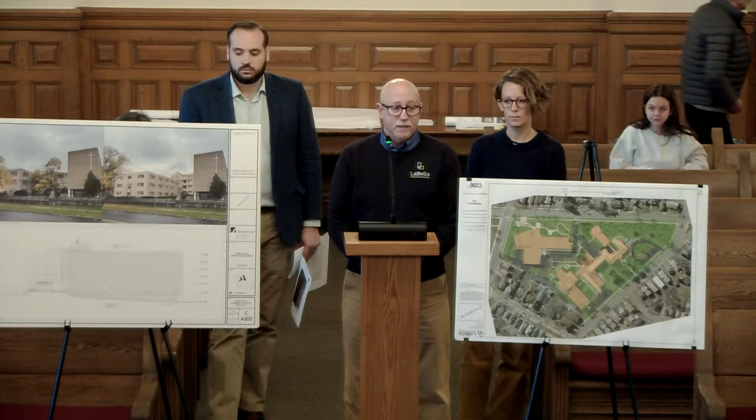Thank you. So today to discuss a proposed project at Maria Regina campus located at 2500 Court Street, corner of Grant and Court near Kirkpatrick's. We're proposing an affordable housing project on the existing campus. With the team that we have here today, I know we'll keep it short so we can open it up for questions. I can present anything that has to do with any of the site work, parking, anything we're dealing with the city right now. Brian and Ivan can talk to the buildings, and I thought I'd have Lindsay give you a brief description as far as how the project came to be and the project moving forward. Okay.

Good morning, Lindsay Allen from Home Leasing. Our address is 75 South Clinton Avenue, Suite 700 in Rochester, New York, 14604, I believe. We are redeveloping this campus into an affordable community for seniors. Proposed are 181 apartments across 5 of the 6 historic buildings on the campus.

The image that I provided here just shows you sort of a campus key from a historical perspective, when the buildings were constructed, some of the dates of those additions, and the building that we are not proposing to redevelop for housing is the chapel that's on the bottom left side of that image. We do have a very interested organization; we have a letter of intent for them to take over the chapel. So in reality, at the end of the day, the entire campus will be fully redeveloped and active once again.

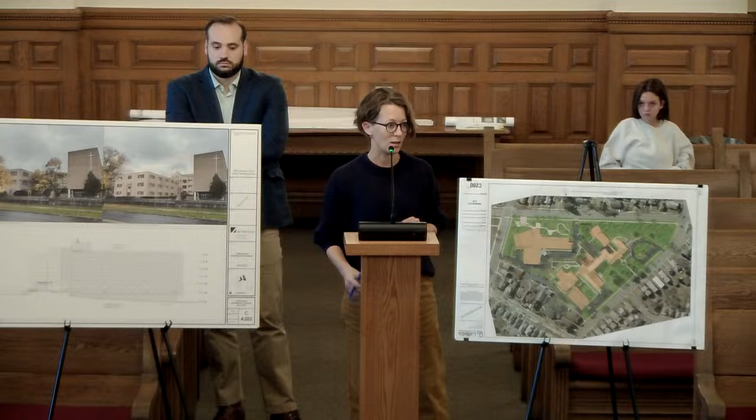But as you know, there's been a lot of proposals for the site. It's very difficult to redevelop, and we are working very hard to make sure that we balance the rehabilitation to mitigate the blight that's on this large block in a residential neighborhood and to provide much needed affordable housing to the seniors in Syracuse. So with that introduction, I'm going to turn it over to our architects to discuss a couple of the details here today. Thank you.

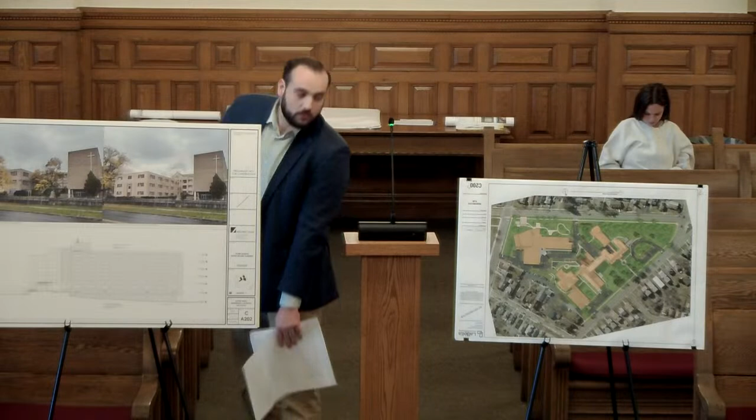Good morning, everybody. I'm Ivan Hansen. I'm an architect with the Architect Team, the architect on the project. Address, please. Oh yes, 614 James Street, Suite 200. I'll go through a couple of the major changes to the buildings that we're proposing. So if you look at the board. Okay, so this is what we call the convent school and the library addition. The convent school is a 1902 building, and I believe the library was built in the late 50s, early 60s. Both those buildings, we're proposing to turn those into residential units. In order to do so, we're proposing an elevator addition in between the two buildings.

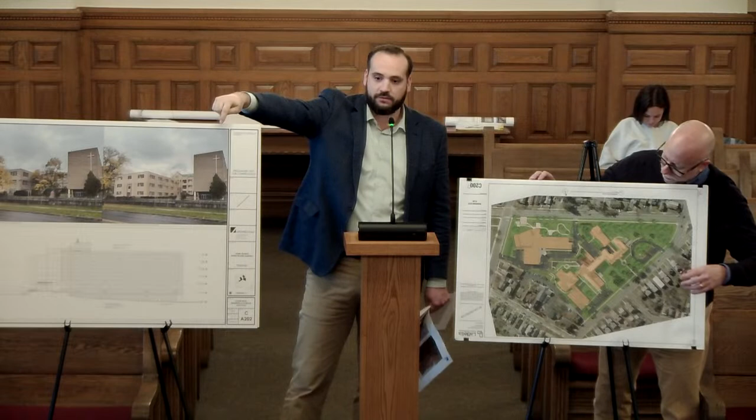And this top image here. So we have the existing conditions that was taken earlier this week from Court Street. And then here we have a visualization of the proposed elevator addition. That is the only view where the new elevator tower is visible from Court Street, the front elevation of the library, and then as you move further north, the elevator tower is blocked from view due to existing buildings.

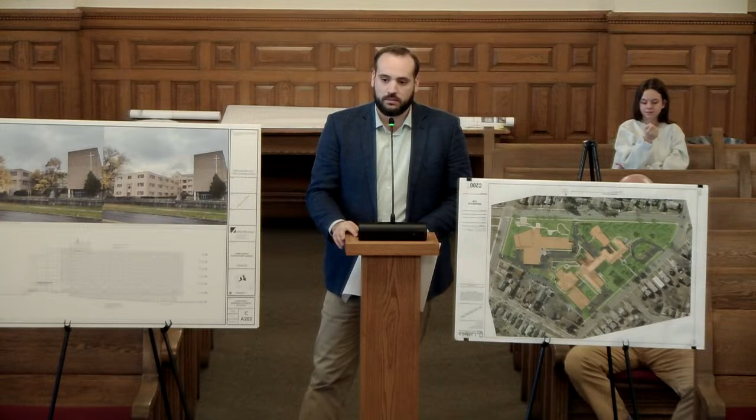Also on this building, the current conditions of the convent school, the fenestration is composed of aluminum awning windows on the bottom, the glass block up above. That was, I guess, kind of a modification to the original, which was mostly double hung windows. So we're proposing to reintroduce the double hung windows that you would see on the original convent school.

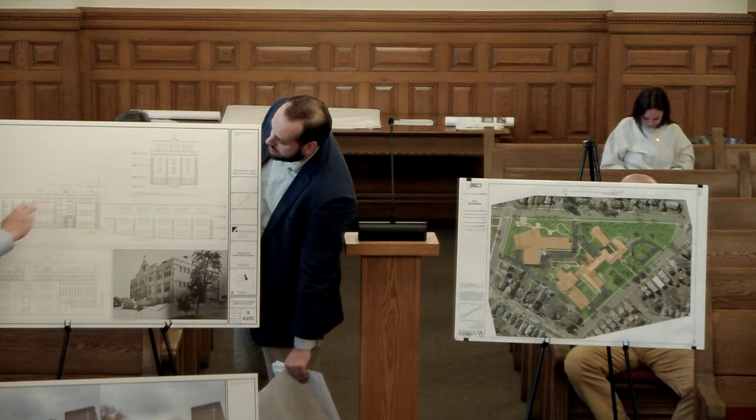Yeah, this is a... Those will be what? Are they going to be aluminum clad or? Okay. Can you point out in the site plan where this elevator tower will be? And what building is it? Is it bridging both structures?

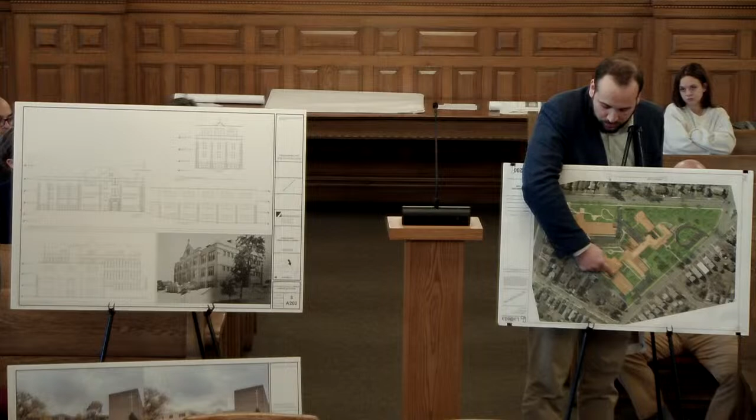Yes. So this is the convent school. This is the library. Here's Court Street. Correct. So the elevator would be nestled right between those two buildings. Okay, so then where that addition is, where does that relate to the convent school on this elevation here? Just that, right there. Okay. Okay, thank you.

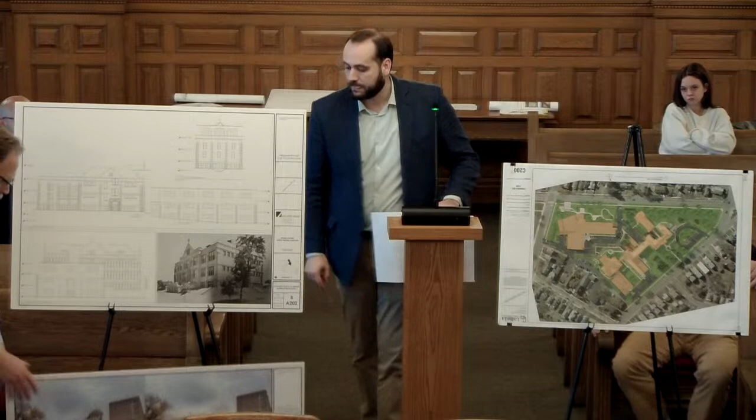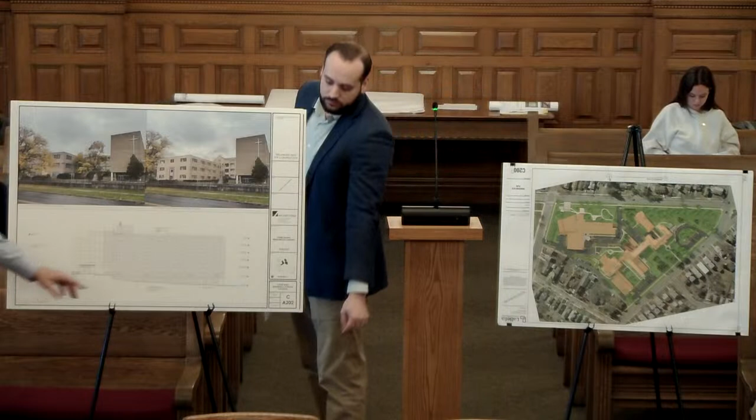Thank you. So I want to point out, you have the mother house. Can you flip that one over? Oh, yes. So the Sisters Wing, it's a building adjacent to the convent school. The L-shaped building. So the elevation that faces the convent school. On the basement level, we're proposing to add additional windows in order to accommodate apartments on that ground floor. And so that's illustrated in this elevation here. You have to provide accessible access to the building, which we currently don't have on that floor.

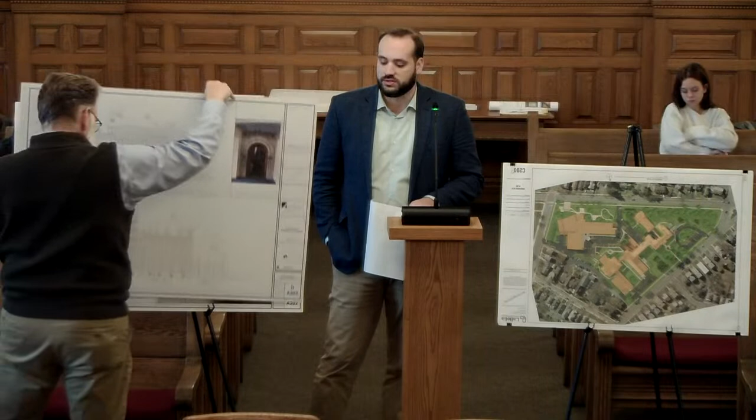Parking in front of that? Yeah, let's go to the mother house. So the mother house, also known as St. Anthony's Convent, the original building on the site, to our knowledge, was designed by Archimedes Russell and built in the 1890s. So it's like a Romanesque style of a building, I believe. And in the 1990s, it had a solarium added onto it.

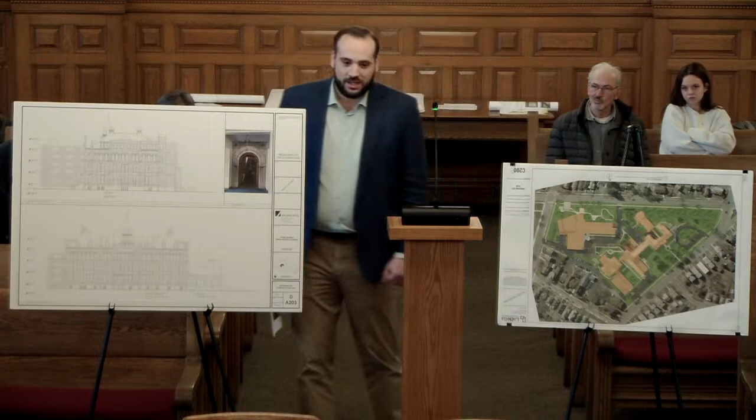We're proposing just to remove that solarium. It doesn't serve a use for us in our proposed use, and it's disingenuous to the original building. It's not very appropriate. And in doing so, we're looking to expose the original entry on that side elevation, which is still intact. And so we'll bring that back to the exterior, and that will become the accessible means of entry into that building. So the elevator and the removal of the solarium are the major building modifications we're proposing.

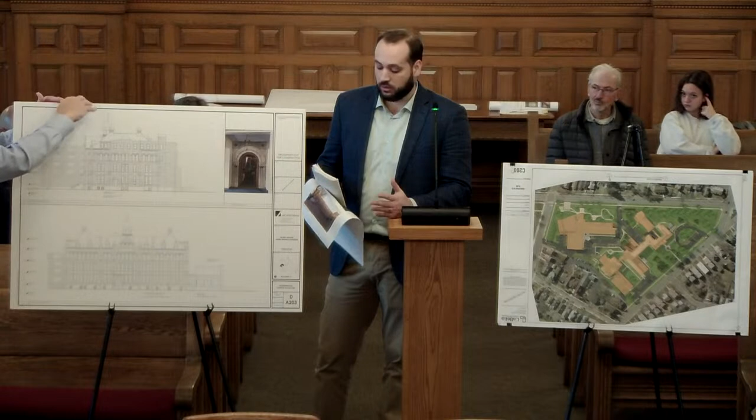And then I want to point out just some smaller items. So this is the 1958 Franciscan Academy, also known as the Gingerbread School on 2500 Grant Boulevard, also a part of the site. We're looking to add residential units in this building also. It contains a large auditorium and a large gym. So we're proposing to add windows on the backstage portion of the auditorium, and on 2 levels in the gym we'll be inserting a second floor. So yeah, this sheet just illustrates where we're proposing the new windows. The east elevation faces Grant Middle School and Kirkpatrick Street.

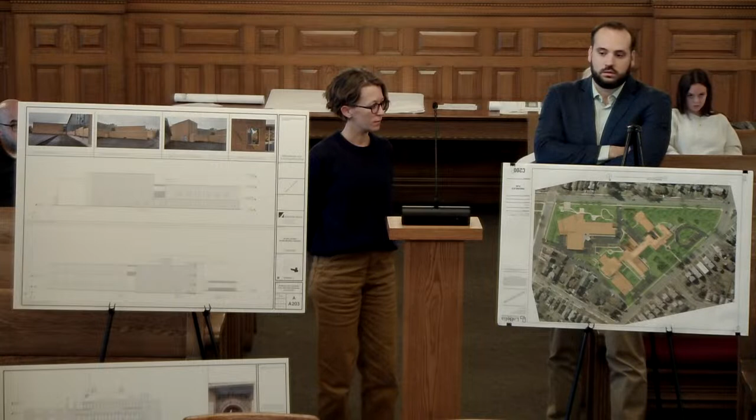I'd just like to sort of conclude a couple of the modifications that were proposed. As I mentioned before, we have talked to the SHPO about all of these, and currently, though they need to see details, of course, in our Part 2 application, we're proceeding forward because they were receptive to these proposals. There is a large, beautiful internal former auditorium in the convent school that we are proposing to restore to its beautiful integrity. And there's a couple other larger spaces that are being retained sort of in exchange for some of the development of the gymnasium where the new windows are going in. So we're finding a balance between these large spaces on campus.

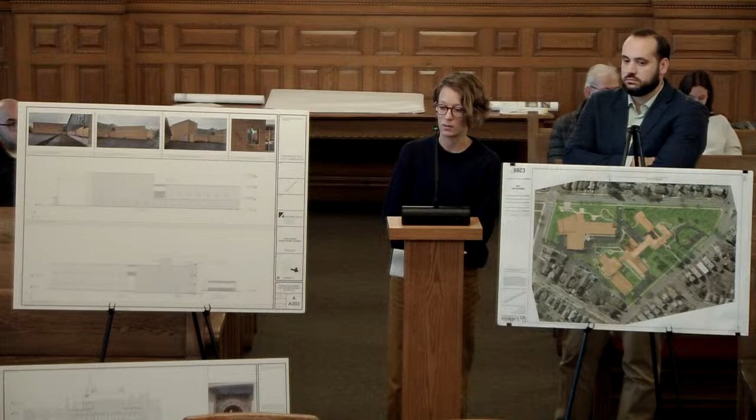Okay, I'll entertain any comments or questions from the board. I want to remind the board that this is a site plan review and our jurisdiction is to comment. Any comments by any members of the board? Looks like a great proposal. Are you adding additional pavement, or is there a mitigation factor there?

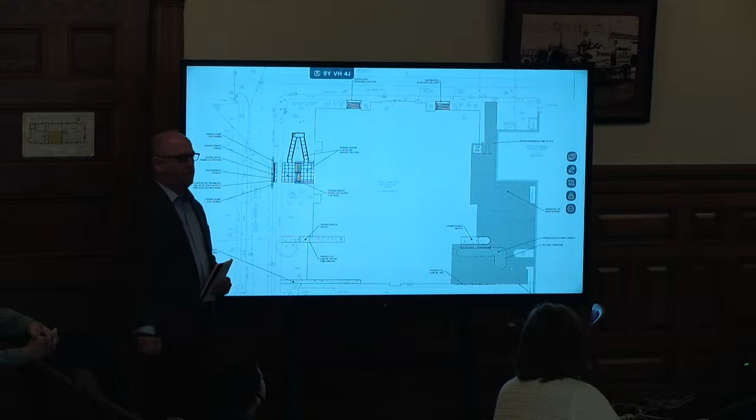We do have some trickery once we get in there. They have to take a small lift to get up to the main level. There's a lot of things going on in this building. The original building is actually 3 feet off of the 1930s addition because they based the floor levels of the 1930s addition on the stage when they did the auditorium. So everything's a little off.

But this does allow us to get in the building, and in terms of accessibility, because it's been a thing that we obviously are passionate about and want to make sure we're addressing, there's 2 elevators in this building to get people to every single level. Because again, we're dealing with a lot of different levels.

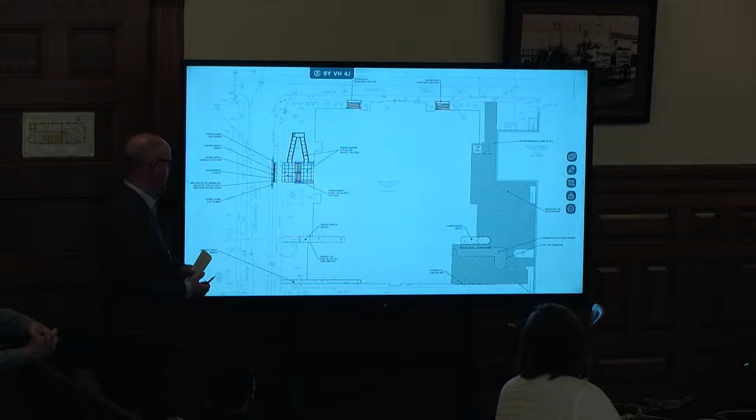A little more detail to the switchback, and again, we tried to keep it as simple as possible, just in the lawn here. If there's ever a time in the future that someone wants to go in a different direction, that's possible, but this is something we felt was the best and most sympathetic to the facade. Over here, you see this big box here. That's a below grade vault for National Grid, bringing our electrical in. That's existing. We're not touching that. I just wanted to note it.

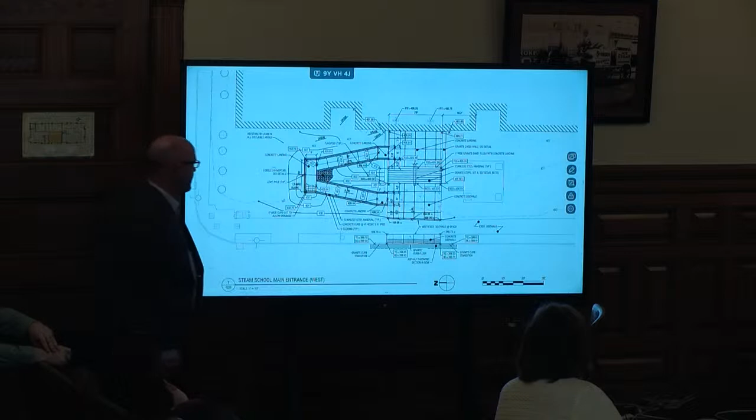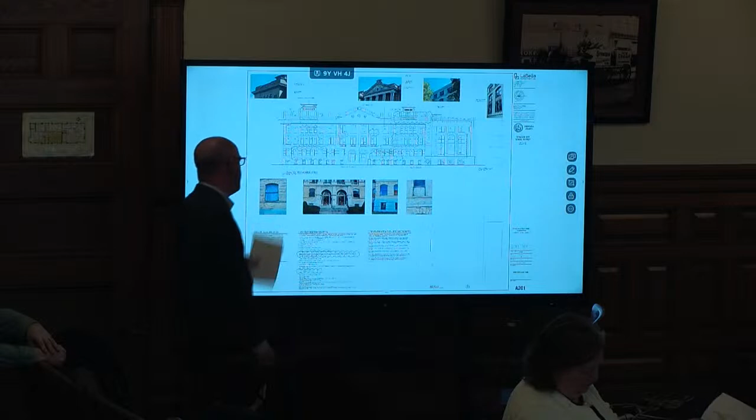Floor plans, I can skip that. I got a better version for that. You have higher def versions of these, but essentially this is our drawing set. Again, it's been reviewed by the county. It's at State Ed right now. SHPO has approved this. Again, just calling out all the different masonry work on the facades.

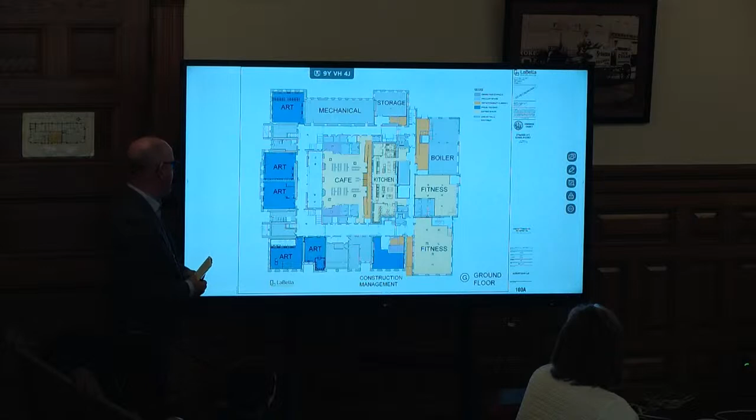Sure, I think what you probably want to see is the auditorium and the main entrance. I'll just stick to those. In general, though, I'll just note that this was a school. It never really truly got converted to anything else, even though there was an attempt. So the majority of our work was programming spaces into the existing building. There's very little moving walls around. For the most part, we're able to adapt our program to the new building.

This is the grade level, or below grade level. And predominantly down here, we have some large spaces that we're using for art, fitness, cafeteria.

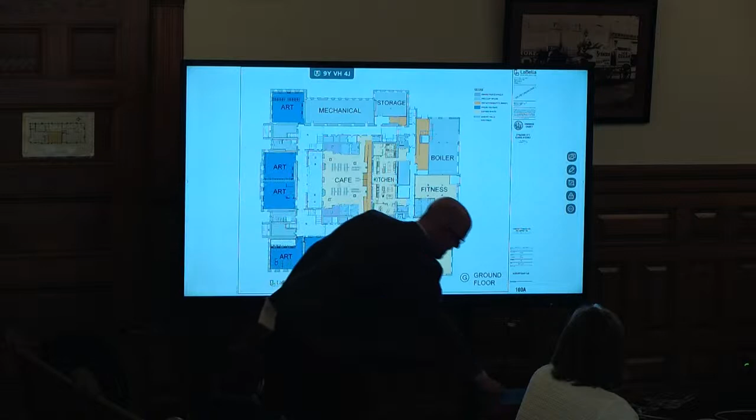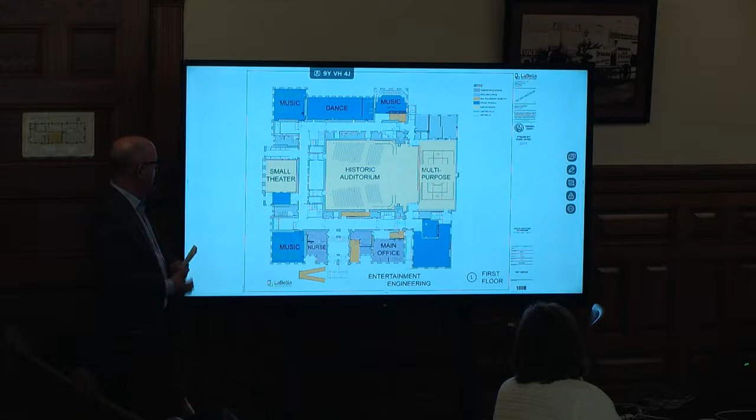Probably the most important level in terms of history here, the auditorium level. So this U-shape was the original 1900s building, and then the auditorium, and then this piece ends up coming in 1930. So we don't see that grand historic entrance that we might see in an auditorium in a lot of schools that we're used to. So the entrances are kind of small. They are double doors, but it's not that historic entrance. But it's interesting because you can come in at all different levels of this auditorium.

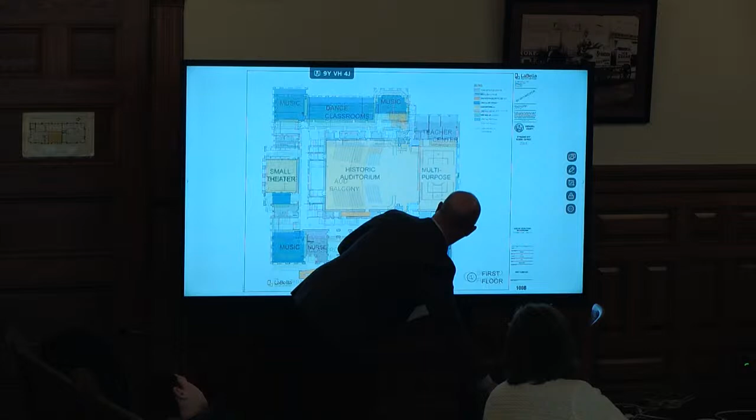Down here again, just the school programming, music, dance, small theaters. I'm going to get to a picture here of the auditorium. Auditorium balcony, access from the second floor and the third floor. And again, just our classrooms in that L shape all the way around. We have some large spaces in the 1930s building that we're using for some of the unique programs like robotics and semiconductor.

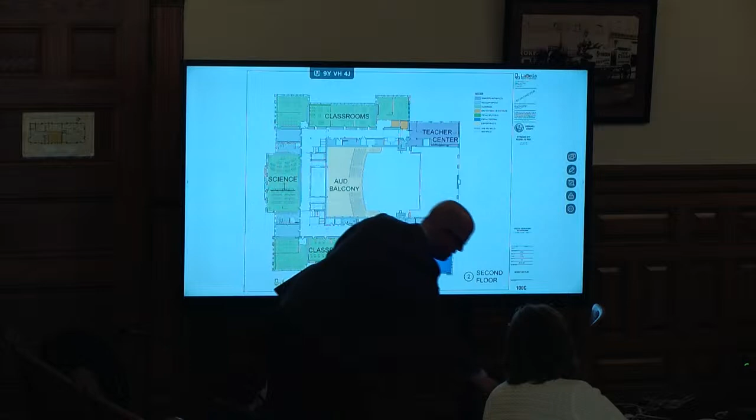And the last level, we have our library and animation. We can also access the balcony at this level too, so it's really interesting being able to do this.

The existing light fixtures are destroyed for the most part, but I'm going to show you a picture of what we're doing. But our intent here is restore the auditorium in its entirety. Of course, the technology is much different, so our renderings kind of show what kind of technology we're adding in here. But the space itself will feel much like it did to begin with.

Seats get replaced. But I will say we have been working with manufacturers that do major auditoriums, historic renovations, and they in fact even have almost identical end panels to what we had here. Someone walking in is going to think that we probably restored the seats. They're going to look very original.

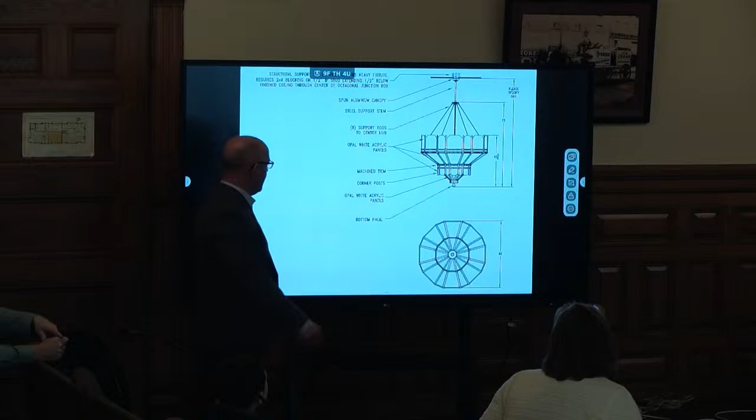But again, working with that color palette throughout the building, and a lot of really interesting details in this building. I think I have quite a few more, but I won't go any deeper than that in terms of our images. We pretty much modeled and created images of the entire building.

Thank you very much. Any comments or questions from the board? Couple of comments. Sorry. Go ahead. Go ahead, Petra. Oh, I wanted to know, the stage, there's like railings going onto the stage. What is the purpose of those and why are they so?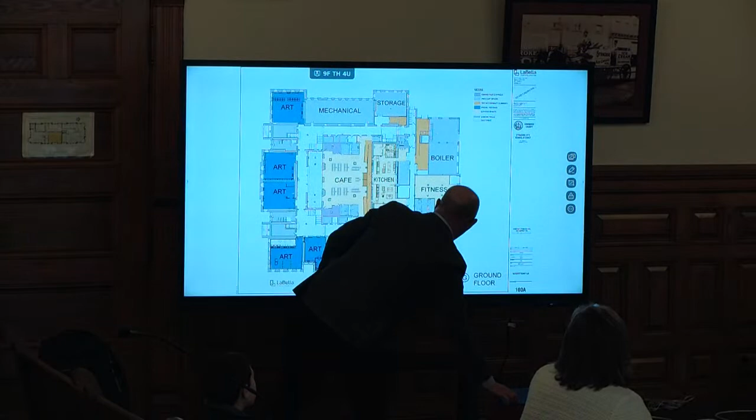Great. Great, thank you. Correct.

Awesome, thank you very much. Perfect. Well, then I'm sure our comment will be exceedingly positive. Absolutely. Okay. No other comments? Thank you very much. That would be great. Thanks so much.

Okay, before we get to the National Register nominations, we'd like to go back to CA-23-27, the certificate of appropriateness at 945 Comstock Ave. I open up the discussion to the board for comments. I have a comment on the roof of the sunroom. We don't have any north or south elevations that show window fenestration patterns? Does that hip roof impact any second floor windows, transferring from a flat roof to a hip roof?